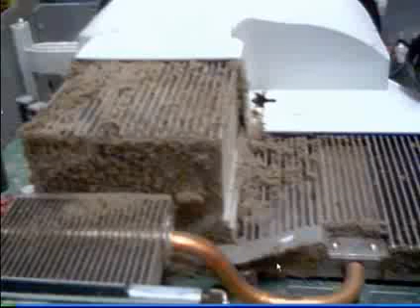Hello, my name is Daniel, and this video is all about the GPU chip as seen here and the CPU chip as seen here. You notice this dust buildup. This is 98% of the cause of all your red light issues. The airflow is blocked from traveling through the heat sinks, causing the chips beneath to run excessively hot.

You must keep your box clean and free of dust. This will not only crystallize and crack solder joints beneath your chips, but it will also dry out the thermal paste that transfers the heat from the chip to the heat sink.

Now, because I have so many people screaming at me, threatening to sue me, even though I tell them to go for it because I love the publicity and I'd love to countersue them and make them pay back and buy new boxes for everybody they've screwed up.

Anyway, I have decided to draw a picture and show you what is going on. So let's start here. In this video illustration, I have provided a heat sink, a chip, the motherboard, the case, and another component here, and a rough drawing of the disk drive that was a little on the rush side. This is representing the dust. Airflow traveling through the heatsink hits the dust and goes around and out the fan.

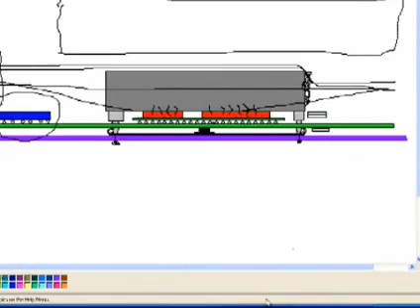You cannot do that by unplugging the fans. There is no difference between unplugging the fans and wrapping your box in a towel. Let me correct that. The one difference is when you wrap your box in a towel, you damage your disk drive. There's a lot of plastic parts in there, and this thing will get up to almost 200 degrees or more, depending on how hot it gets, and it will warp, and you will wind up with open tray issues as well. Not to mention causing 60 times more damage to the solder beneath your chips than what you had before you started.

Okay, so let's take a look here. You notice these legs. You see this bolt section? This is what they use to attach the leg to the heatsink. This is 2 millimeters high. You'll notice if you open up your 360 before ever doing any kind of bolting to it, that there is a gap between it and the motherboard. When they put the two 1mm washers here, it's the exact same height as this, right? Which means when they sandwich that down, it's going to cause this part of the board to bow. We're going to take a look at that in a new slide here. Let me switch.

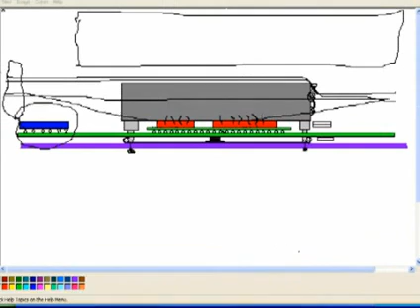There we go. Alright, now notice we got bolts now, and if they get the tension just right and they get it to sit perfectly flush, which is extremely difficult with the bolts, but let's say they did. There will be a little bit of a gap between these two washers and these two washers in the motherboard. Okay? But now you're free from the case.

This allows the motherboard itself, next time the dust builds up on the heat sink, to flex. In other words, it will bow upward because of the heat of the box. This will crack solder joints in other locations of your box, in most cases causing permanent damage to the box, and I'll explain the permanent damage shortly thereafter.

And let's say it didn't bow, but it did recrystallize and crack the solder, because over a period of time these bolts will become loose again because there is no longer a board support here holding the chip in place. This will begin to sag due to the heat weakening the material. Alright, this will cause a gap right about through here and through here, causing a hot spot, causing these to melt because they're hot. This will cause even more of a bow. They'll eventually crystallize and crack. Let's say they did use a BGA welder, they did everything perfect, and they got it just like this.

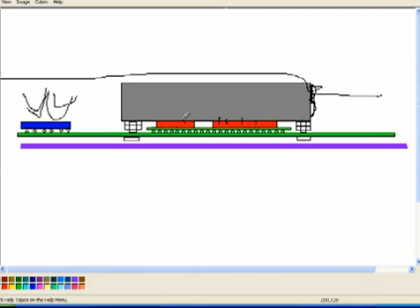Okay, which would act the same as the dust not pulling the heat off of the heat sink. Alright, now this will crack, and what they will do is they'll come back and they will tighten these screws that they put in here up again. Okay, and this will cause even more tension on the chips, and I'm going to show you that in a minute, but I wanted to touch on why this is like this.

A lot of people use heat guns when they reflow these, and they'll also use the heat gun on these chips here. These chips very rarely, if ever, go bad unless somebody has used a heat gun on it. So do not use a heat gun on these chips unless you know for a fact it's that chip and somebody else has done a heat gun trick on it. You definitely want to use a BGA welder, because if you get 1 or 2 degrees too high, these little solder balls underneath here are going to pop and melt into each other and cause a permanent red light issue that requires a total reball of that chip, which is extremely not a fun and easy thing to do.

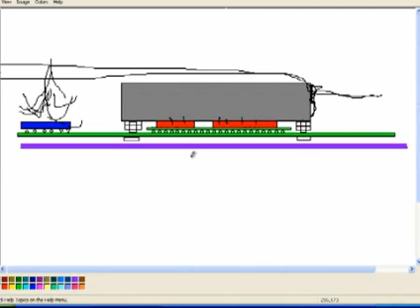Now the two 1mm washers are holding the motherboard, and the bolt is sandwiching the motherboard, pulling the motherboard upward, causing it to bow, separating the center portion of the chip as well, causing hot spots. The heat is now only transferring from the outside edges of the chip, and the center portion of the chip is now running burning hot. This makes the second repair last even less time.

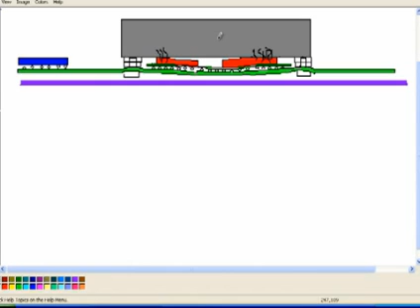This shorter time is a direct result of the hot spots caused by this, which can become a permanent overheating issue if it bows enough that the gap is such that it is not able to cool, even if you replace the X clamp, because now the chip itself has become bowed with the motherboard due to them overheating the box with the heatsink on it under pressure. Now you notice that I have a little gap between these solder balls here and over here. This is why. We're going to go to the next slide.

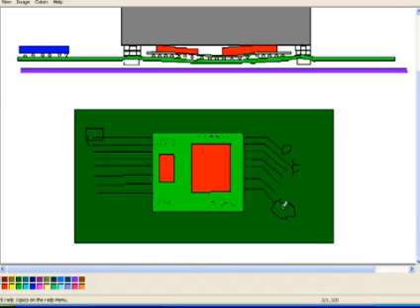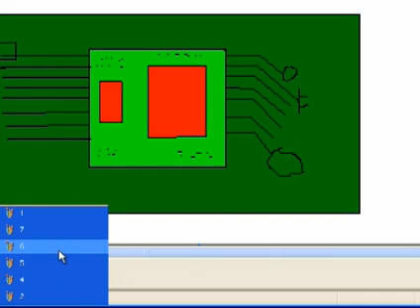Okay, we have components on the board with trace lines that go up under the chip and then through the chip and out to other components. Well, what the vast majority of these people doing these repairs don't understand is that with the bolt method you have this. This is the motherboard.

The component lines go along the top side of the board to the solder pad that the solder ball rests on, which is attached to the chip. What they don't understand is there is a vertical trace line that runs straight down through the motherboard to contacts on the opposite side of the board, which then in turn go to components which will either go back to another solder ball into the chip or off to another component. Oops, wrong one. Should have had it on pencil. Yeah, off to another component somewhere else.

Alright, and when this board bows down like this, because they've just tightened these things up, this is what happens. The solder ball 98% of the time will yank the contact off of the green portion of the board, breaking that vertical trace, because it will not flex or pull off the board and stay connected like the trace lines that run along the top. They have a little bit of room to flex because they can pull off the board, but the vertical trace line is set through the board and has no room for flexing or bowing.

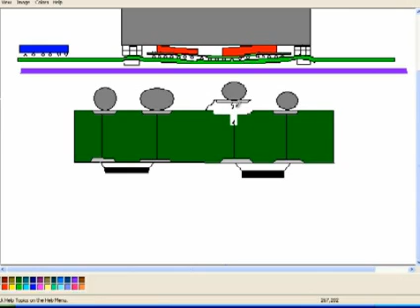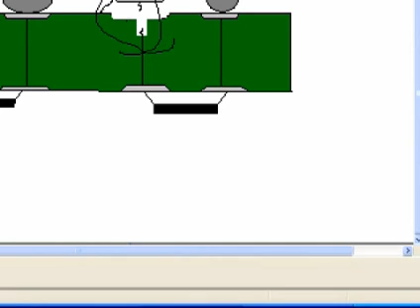So once it comes off, even the tiniest amount will snap that vertical trace line, and now you have a permanent non-repairable box. There is just no way to reattach that little tiny vertical trace line whatsoever. So that is exactly why I say do not ever allow anyone to put bolts in your box.

Anybody who would like to make a video and try to convince me of an alternative or how this is not happening, then by all means do it. But I would also like to see your background in electronics. I would be more than happy to entertain any of your bullshit claims about the bolting method being an acceptable method of repair for any reason whatsoever.